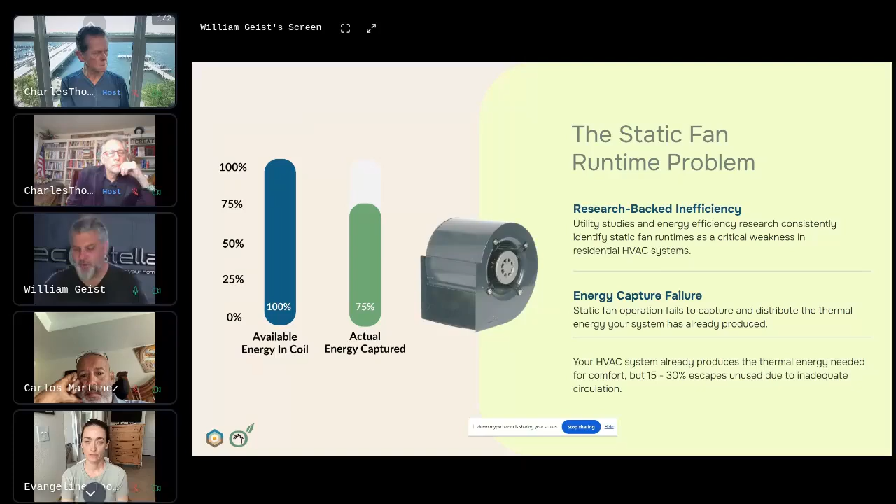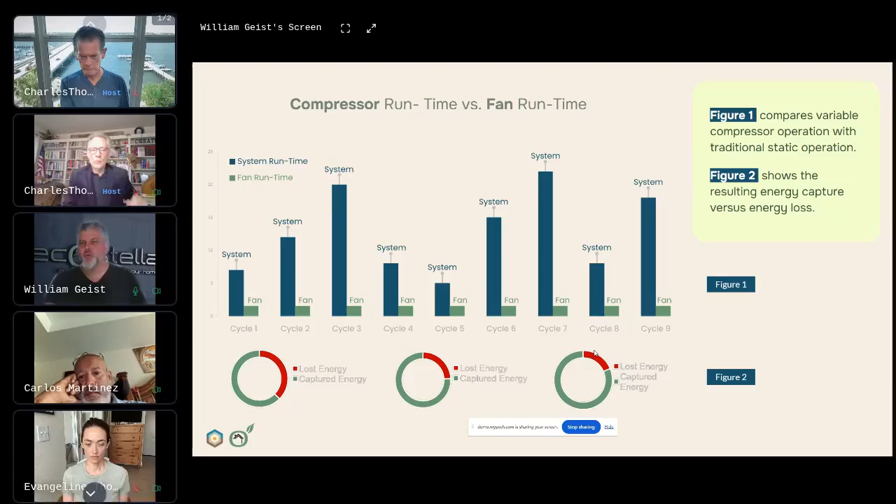This is another picture to show your compressor running at different lengths of time here, and then your fan is the same. And because of this, you're losing different pieces of energy throughout the day, right? And they add up. It's expensive. This part is the compressor, where again, you've got 100% capacity, right? This is where we should stop, but if the compressor is still calling, it's going to continue to run, and this is all waste. The cup is just overflowing. The system can't hold it, right? And so we want to prevent that.

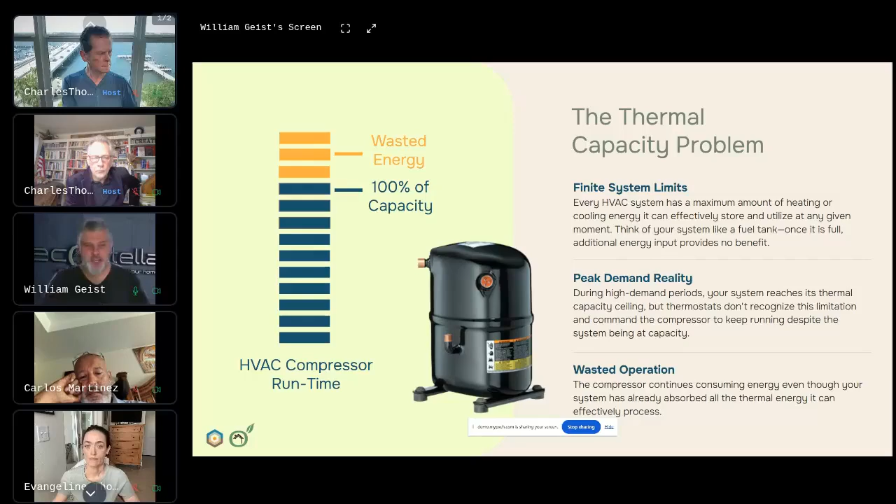So this is really a twofold method at the end of the day. We are, A, going to minimize waste by capturing what we have, and B, minimize waste by eliminating unnecessary runtime altogether.

Now, the second product that we can put with this is the Stella APC. We're going to have to update these pictures. They don't look like this anymore. They look nicer now. I don't have the example with me because my wife moves my stuff.

But what happens with the fan motors, right? So we've talked about variable timing. Now we can talk about variable speed, or more accurately, adaptive speed. And so what happens with these motors is the system kicks on, right? Thermostat's like, hey, turn the system on. We need cold air. And that fan motor starts up, goes right to 100% speed, stays there the whole time, then drops off at the end.

That's the equivalent of flooring your car from one red light to the next, which we all know is not efficient. Now, we could take that perfectly good single speed motor out and throw it in the trash can and put a variable speed motor in. You're talking thousands of dollars as well as downtime. It doesn't really make sense at the end of the day. On the commercial side, yes, in some applications. But for these single phase systems, it really doesn't.

And so the next best thing is the Stella APC. It's going to wire directly into the motor. And again, it's a computer that's just talking to the motor, and through voltage signals, is telling it, don't go right to 100% speed. Let's soft start and only use 40% of that inrush current, right? We're going to eliminate 60% of it, which is going to help demand.

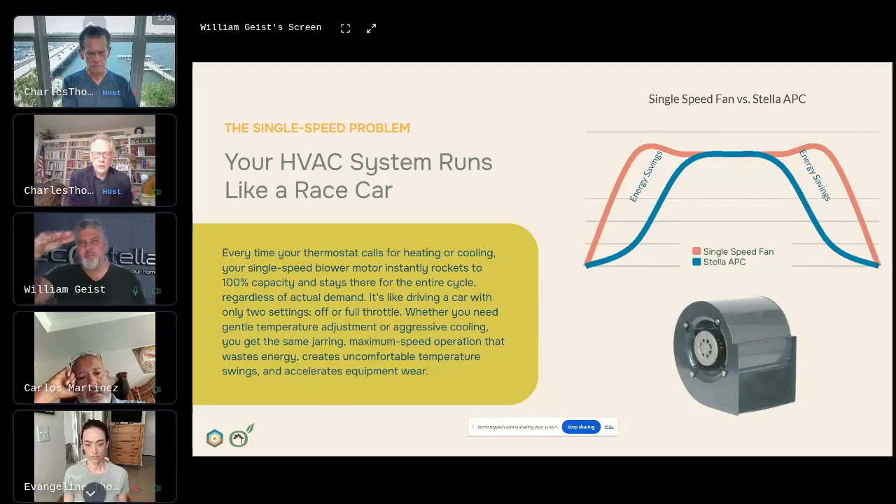And then we're going to step the speed up and step it back down. Much more efficient than just running at full speed the entire time. Anytime we're at a lower speed, as you can see here in this graph, all of the savings come in the beginning and at the end of the cycle. Okay? For you nerds out there, this capitalizes on a principle called Cube law.

It's a physics principle. Cube law states that a 20% decrease in speed is equivalent to a 50% decrease in energy. And so anytime we're able to do this, and it's not 20% the whole time, this steps up, it goes like 20, 50, 80, 100, and back down, right? But this is energy savings all day long.

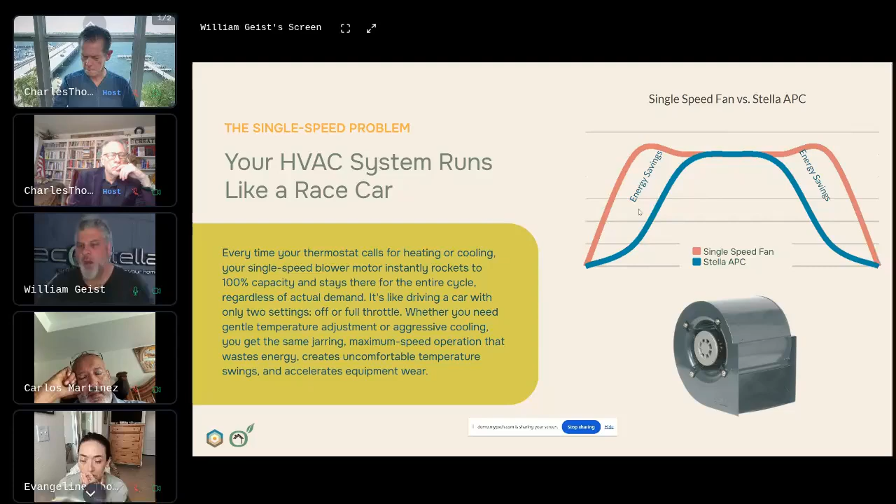By the way, an ancillary benefit of the APC, well, there's two actually. One is dehumidification. So if you're in a place like Florida, wink wink, where there's a lot of humidity, this actually helps because we're mixing the air at different speeds, right? And you're getting constant air, right?

So with this, the fan is a minimum of 10% speed. And so you're getting constant air, constant conditioned air. It's going to help eliminate the humidity. I shouldn't say eliminate, I should say significantly reduce. And then it also does something called destratification, which, 8th grade earth science, right? Hot air goes up, cold air goes down. And so again, by mixing the air at different speeds, we get a more stable temperature environment.

The third measure that we can employ is called the SynCat 360. Any system that's 4 to 5 years old begins to suffer from a condition called oil fouling, which you can see pictured here. Oil migrates from the compressor into the refrigerant, kind of gums things up, and it slows everything down. And now the system's got to work harder to charge the refrigerant. And so, again, that leads to longer runtime and excessive energy use.

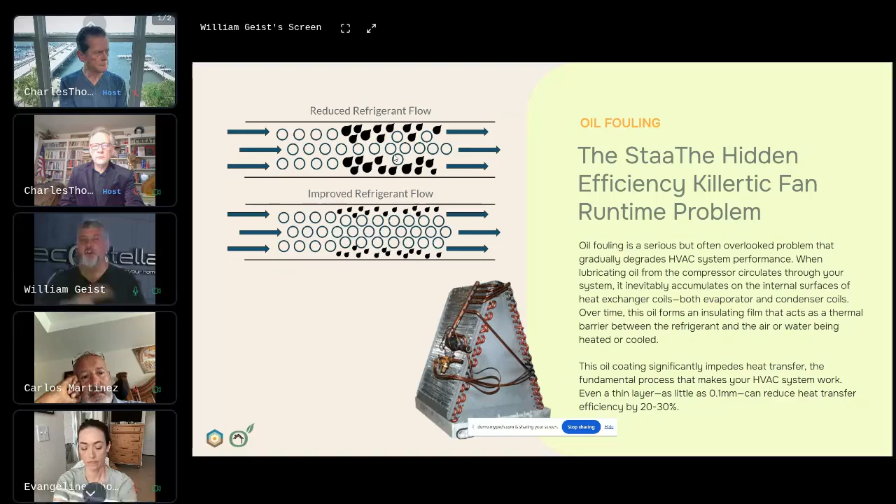Now, we can't get this oil completely out. I mean, we could, but again, you'd have to vacuum it all out. Very, very expensive. Put new stuff in, thousands of dollars. No good. So instead, we inject the SynCat 360. Okay? This goes in, and think about it like Drano. It's going to break up all of the stuff that's gunked up in the coils. It's going to break those oil particles down very, very small. We're going to regain a lot of that viscosity, and with it, the efficiency that was lost.

The thing to tell the homeowner in this case is that their HVAC system loses 1.5% of its efficiency every single year. So if you're talking to someone and you ask them how old their unit is, which is a key question, and they say it's 10 years old, you're down 15% at least just from this, on top of the inherent inefficiencies that already exist.

Okay, so this is where the energy savings come from that we talk about. This is a one-time injection. Again, everything that we're doing with EcoStella, lifetime warranty. Okay, it's a one-time injection, stays in there for life, and just does its job on an ongoing basis. Now, the question becomes, what if their system is only 2 years old or 3 years old? Can we do it? The answer is yes, but with a slight change in positioning, right?

Because we haven't lost a whole lot of efficiency to regain, so they're not going to see that piece of it. But instead, what we'll do by putting this in now is preventing that inefficiency from ever happening. So that 1.5% won't be completely eliminated, but maybe we reduce it by 1.2. So now you're left with 0.3, right? Because any oil that comes in there now is immediately going to get broken down. No sediment of any kind is going to build up, and so you're just never going to have those issues.

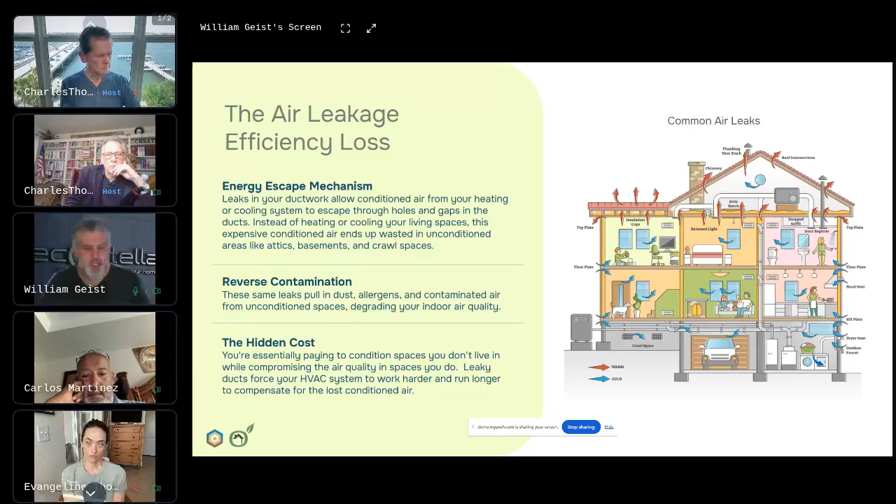And so, what we can do with this, which is a tremendous thing here, is AeroSeal, right? So, you have access to this nationwide. And what AeroSeal does is they bring in this machine. Well, first they're going to do a blower door test. So they're going to show you the pressure in your home. They're going to show you how much air you're losing. Then they'll hook up this AeroSeal machine. They spray a vaporized glue into your duct systems, which patch up all the holes, right? And now 100% of your air from your system is getting into your home.

I can tell you, homeowners that we've done this for, immediate noticeable difference. I mean, day one, in terms of the house getting colder faster or warmer faster because they're not losing that air. Okay. And this is a big jump in the energy savings. So this is in our elite bundle. Because this one thing is, I forget the cost of it, somewhere between like $3,000 and $4,000, something like that. But for those people that it makes sense for, very, very, very effective. Okay.

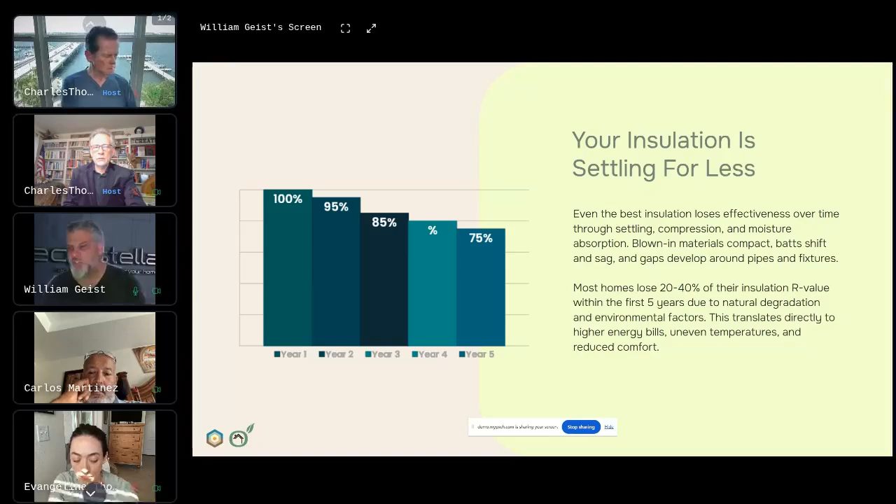We've also got access to insulation, right? Nationwide. I've got a nationwide agreement with a company. This is a similar kind of thing to the SynCat, where you can see its insulation drops off by year 3. We're down 15%, right? And it continues down from there. And so we can come in, we can do some blown-in insulation, we can add to what's there, and insulate the home better itself.

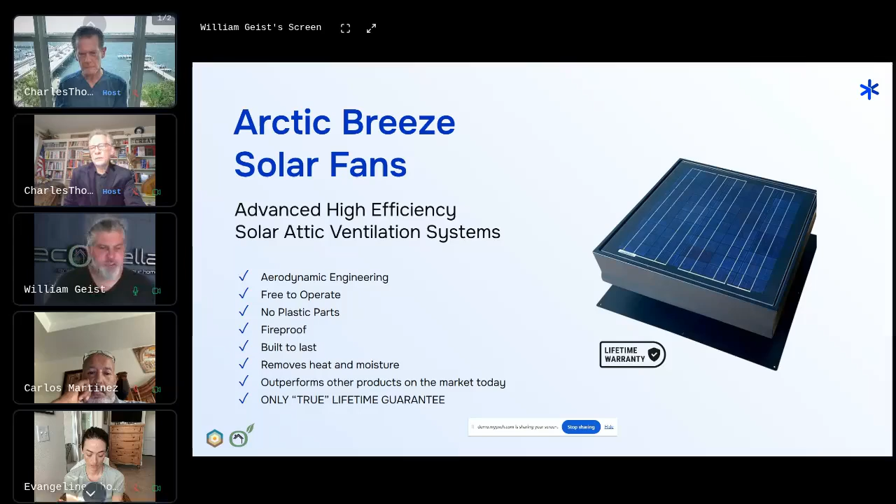Arctic Breeze solar fans. So these are great. I personally don't have a whole lot of experience with these, but I can tell you, pulling that air 60 times a day out of the attic, right, as it's heating up in there, pulling that out is extremely beneficial, and this thing pays for itself in not a long time at all. Dude, I'm gonna skip some of that.

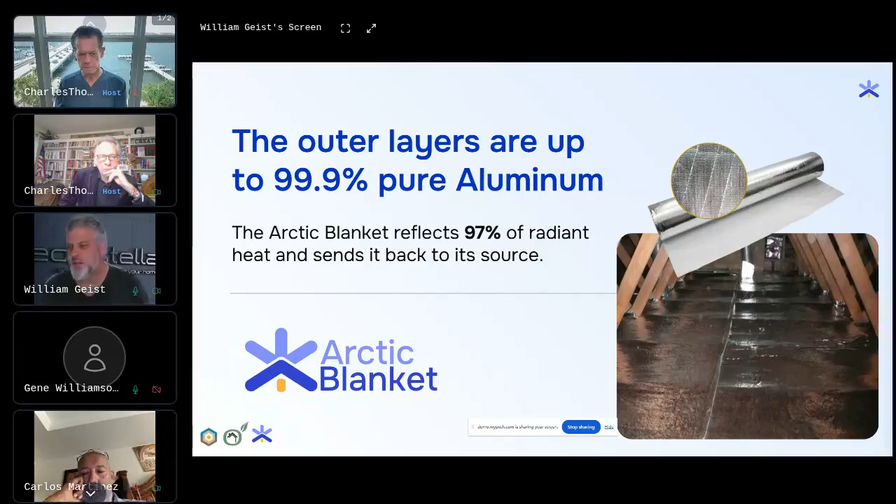Arctic blanket. This is a NASA created product here, right? Super easy to put this in, staple it down, and you would do this or the insulation, probably not both, right? I like this honestly from a cost and an application standpoint, but it depends on the homeowner. Let's see. So let's continue with that. I want to show you guys the bundles so you can see that as well.

As you can see, we're moving fast with some of the improvements with Will. He just got the deck in real time. Yeah, that's right. By the way, Will, just two quick notes. You can hide that little bar that's showing at the bottom of the slide. You see where it's got the blue right there. Yeah, you can hide that. And then when we're done, I'd love to have Carlos share with you his win on his own home, getting the blanket and the breeze installed once we get to a stop point. Yeah, for sure. All right.

So with the bundles, the first thing that I want you to know, the idea with the bundles is there's a power in 3. So even though you've got access to multiple bundles, they're all common set bundles, right? But there's ones that are specifically EcoStella, and then there's a couple other ones. My recommendation to you is, as you talk to the homeowner and you figure out what their needs are, you customize and you say, hey, here's the 3 things I would recommend to you, and present them as a good, better, best option, right?

My goal is always to sell the one in the middle. Unless it's like, hey, look, this home's got all kinds of opportunity. Your energy bills are through the roof. Depending on your finances, we should go all the way, right? And then you see what the reaction is there.

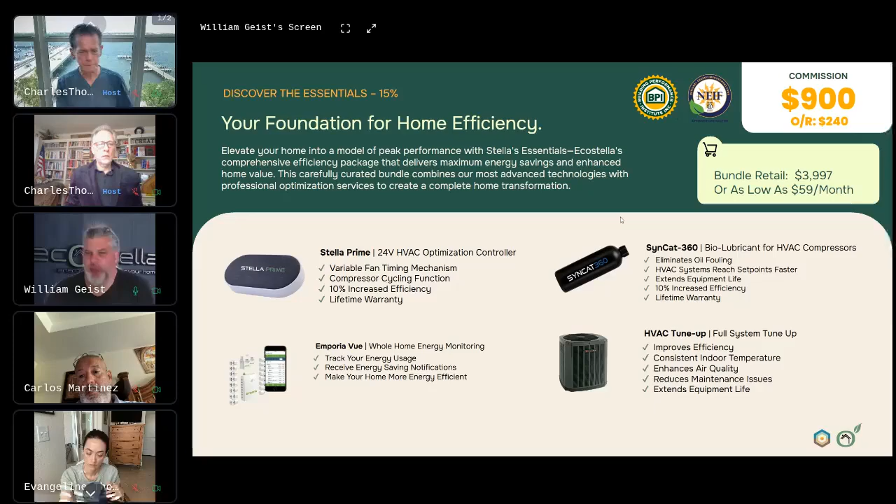I want to add one quick thing there, Will, if you don't mind. Sure. For everyone, look to the upper right. You can actually see the pricing and what the commission is for each of these bundles, as well as if you're a team builder, what the override is for your first generation. The second generation would be half of that because it's 6% and 3%. That gives you a really good idea. So as you see the cost structure, look at the economic benefit that you have in each of these bundles as well. Yeah, absolutely. That is why we're all here at the end of the day. Here to help people.

How you sell that is to say everything from the first part with the tune-up, but then I want this guy to come back in 6-7 months and make sure everything is what it needs to be, right? You should do a tune-up twice a year anyway. And so let's get the next year scheduled right now. I want to make sure that your system's still in good working order. I want to make sure that everything here is functioning the way that it should.

And so, I use that to let a homeowner know, I'm not here today and gone tomorrow. I'm here to become a long-term energy advisor for you, a home advisor, right? Anything you do from now on in your home, I want you to think of me. I want you to think of Commonstead, because there's a whole lot we can do. And someone may start here with a Pro Bundle, and then later on they want to do the Arctic blanket, or one of the other things that they have available. Need a hot water heater? Call us. Well, right? Even if we don't have it, we have it. We'll figure it out. Okay?

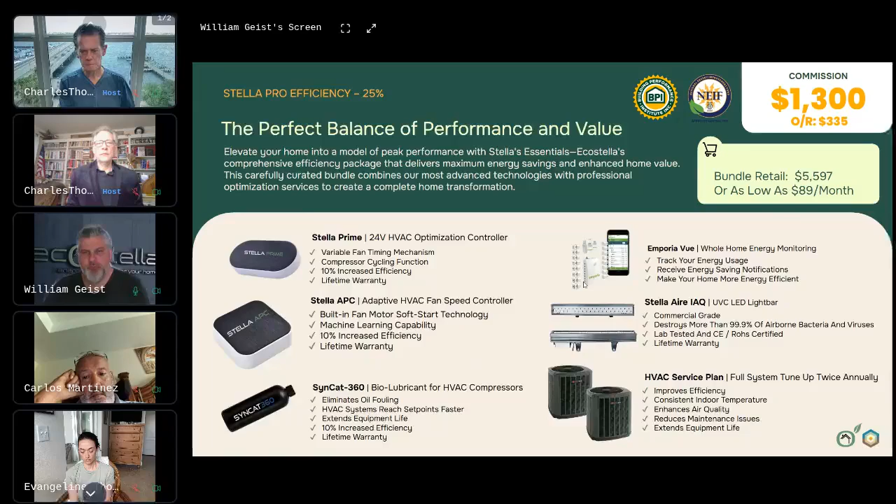And so this is an investment in your home that we're not just going to save you energy, right? And we need to do that. There's never been a better time, right? We're seeing double-digit increases all over the country. The data centers are being built right now. It's going to drive the cost up tremendously. I actually have a chart that I show clients that shows them the last 10 years versus the next 10 years of what's projected. They're not my projections. Okay. And so we're going to help you get in front of this and bring this energy consumption down.

So I love this bundle, especially for the people that have really high energy bills and or older homes. And you're saving up to 35%, I didn't say the percentages. So this one is 35, the Pro is 25, and the Essentials is 15. These are all good, conservative, solid numbers you can stand behind, and then we can add on from there, right?

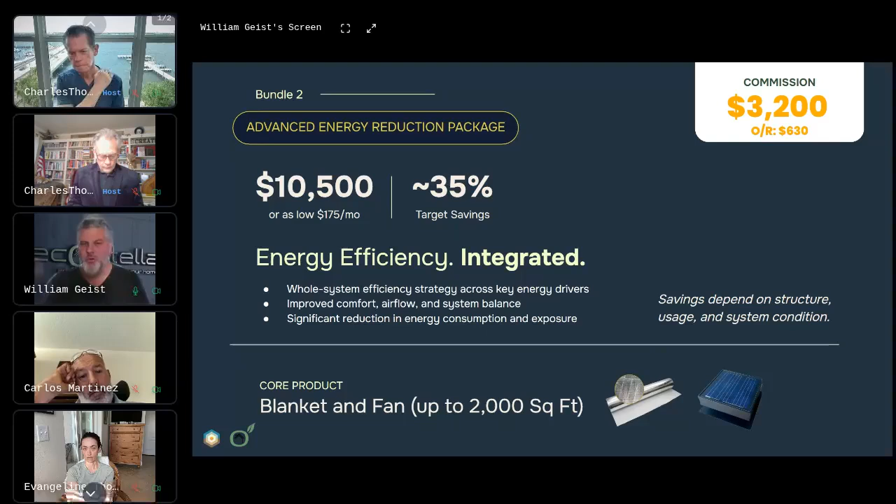So you should never walk away empty-handed. No matter what the situation is, there is a bundle or an option or a strategy that you can employ to help that homeowner.

So you're getting everything from this package here, right? And then we're adding in the Coat Zone and the Stella Prime. The Coat Zone is a treatment for the coils, keeps them free of biological matter and whatnot, protects the system. And so clean coils are an absolute essential part of a system operating the way that it needs to.

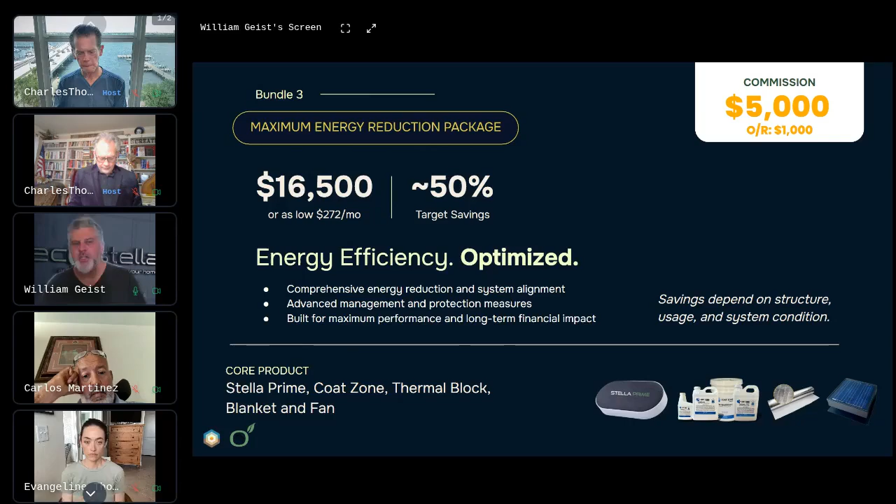And then we've got the water bundles, which I'm not going to speak to because I'm not quite educated on it yet, or at least not enough. But there's plenty of training on that in the Learning Center as well as in the playbooks, so you can go and read that. Just know that whatever the homeowner's needs are with regard to their water, our pros will help them with these new bundles that we have.

These are tremendous commission opportunities. Pricing points are typically $1,000 to $2,000 lower than the average system that's out there. Most of the systems that are out there are knockoff Chinese product.

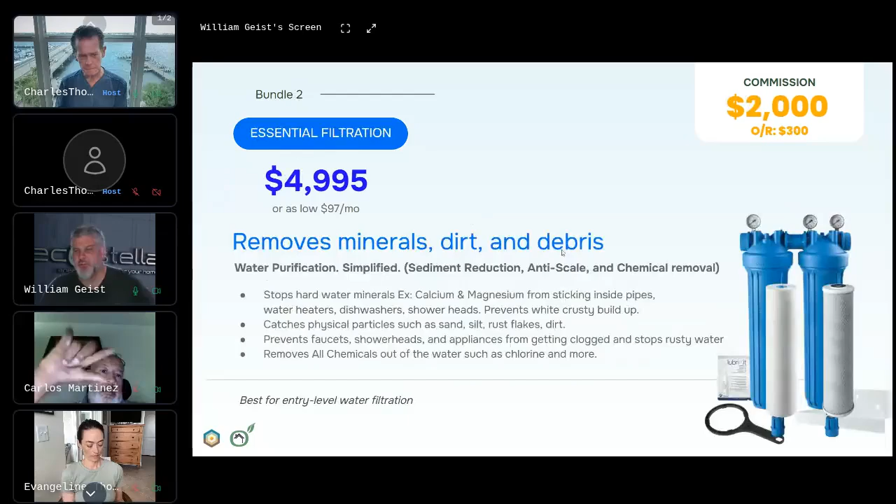These are made in Italy, the best quality water system that you're going to find. A lot of training in the Learning Center, as I said, the playbooks in the Learning Center, so you can dive in there if you want to get to know them. Yep. For me, this is drinking water, so you should just spend as much money as you possibly can to get the best water possible. Amen. Because here we are in America, and we're blessed to have that opportunity.

So, what else? Oh, so the other thing I was going to show you, and Charles, forgive me that we haven't covered this yet, but this is built in Go High Level, so super easy to translate, and we need to build it out more to include some of the other things. But this is something you can pull up on your iPad. You don't have to, right?

But it's a tool where you can kind of go through an assessment with the homeowner and kind of ask some questions, right? Upload a nameplate picture. You're documenting things. I like this because from our side of it, managing the installers, install stuff, it's good to have some of this technical information. It's on file. If the homeowner ever has questions, we can refer to it. We can pull the specs of the system. It's a good investigative discovery type play with the homeowner.

But really, the reason I like it the most is if I was door knocking, I would talk to the homeowner, right? Hey, hot day, energy bills are up. I'm feeling it. I know you are too. Which side of the house is your HVAC system on? Oh, it's on the right side. Cool. Can we go look at that together? Because now, not only am I collecting this information that I need, but I can start planting the seeds, right?